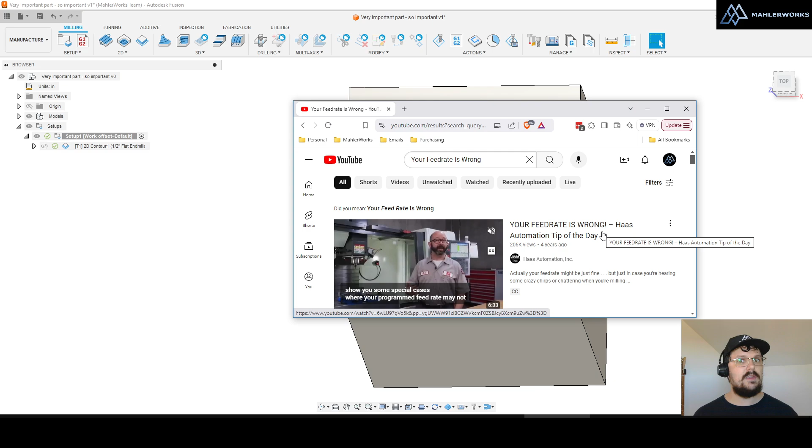And in this video, Mark Terryberry goes over the math and geometry behind why using a large end mill, for example, in a small hole might be programmed with a very incorrect feed rate. And I want to go over that and show you in a real-world example and toolpath what's going on and how to account for it.

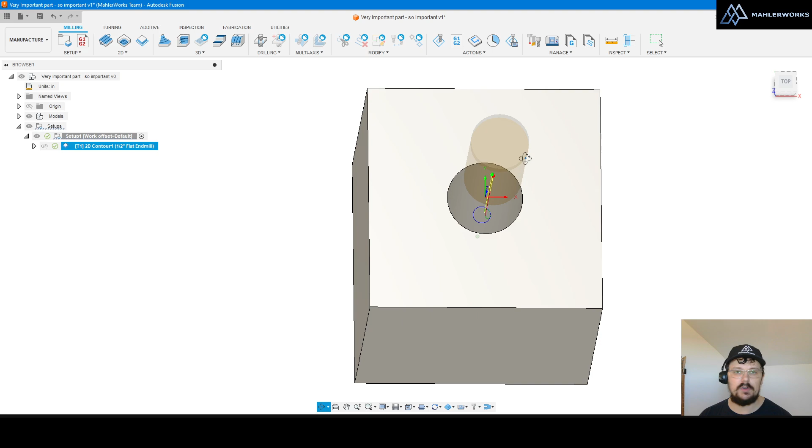I have here a part that has a hole that is 0.65 inches in diameter, and I really want to use a 1/2 inch end mill to interpolate it. Now, if I go into my toolpath, under passes, I am using a compensation type of wear. Another common one would be in computer. Both of those options are going to make a toolpath based off of the center of the tool. This video does not apply if you're using in control or off.

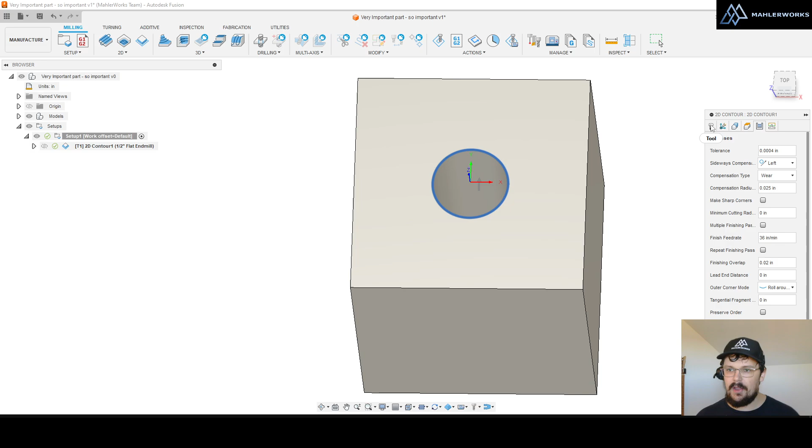If I go over to my tool tab in this toolpath, I see that Fusion's, if I go to aluminum finishing, that's its default feed rate, but this could be any feed rate that you find on an online calculator or a list online of feed rates for a given diameter of end mill. It's going to say something like, in this case, 159 inches per minute.

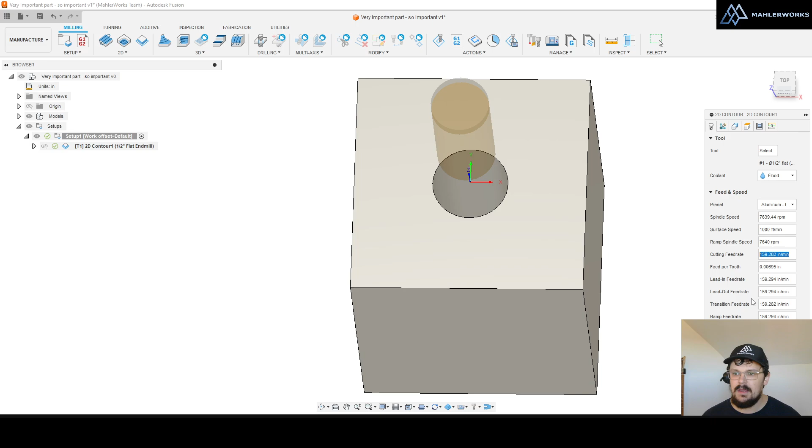Now, if you're a machinist and you're experienced, you know that using a 1/2 inch end mill in a 0.65 inch hole and feeding it at 159 inches a minute does not sound right. It's going to go in that hole and whip around the circle really fast and come on out. Your hole is going to be at least faceted, if not look like trash. And your tool might be worse for the wear as well.

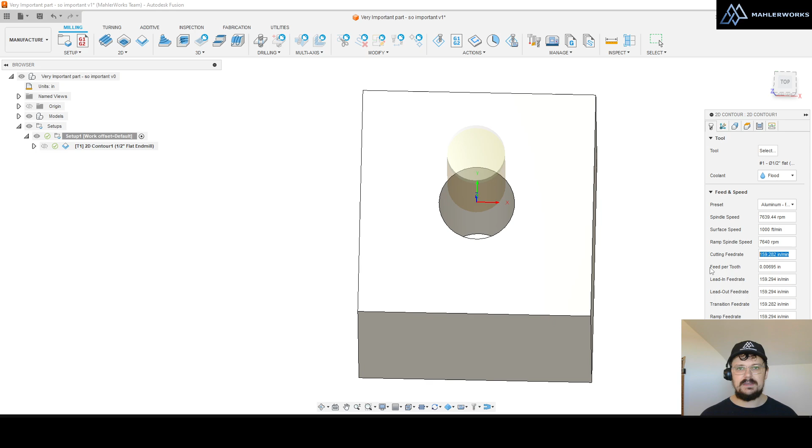The reason is this feed rate is actually for the programmed tool path, which in this case is a much smaller circle than what we're actually cutting. Haas's video goes over that really well, but let me show you the fix. If I go to my Excel spreadsheet that I made a calculator for this very problem, let me show you what I have. I have a hole diameter of 0.65 inches. I have a tool diameter of 0.5 inches. And my supposed feed rate that I'm told I should use is 159 inches per minute.

But based off of the math that Haas goes over in their video, and they explain why we're cutting with the edge of our tool, but we're programming off of the center of our tool, our feed rate is wrong. So our new feed rate actually should be, in this case, about 36 inches per minute. Now, up in the formula here, you can look this over. You can copy this and make it your own. Make your own calculator. I would highly recommend it. This is very useful. But we're doing a little bit of math that Haas's video goes over. So don't just copy this. You can watch their video and figure out the actual math behind this problem.

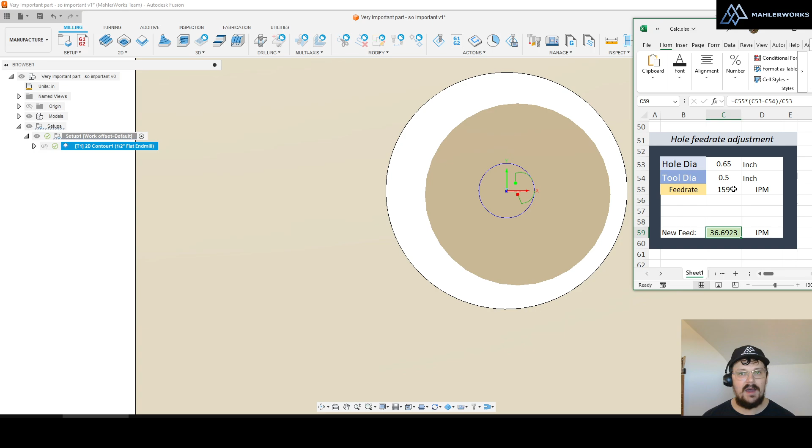So now I know that the feed rate that I should be using is about 36 inches per minute on this hole, not 159. So I'm going to go back to my toolpath, tool tab, and my cutting feed rate, I'm going to make it 36 now. It looks like it already did it for me because I had entered that in earlier. Let me just go through that process properly. If I was on aluminum finishing, my cut feed rate is about 159 inches a minute. I need to change this to 36 inches a minute.

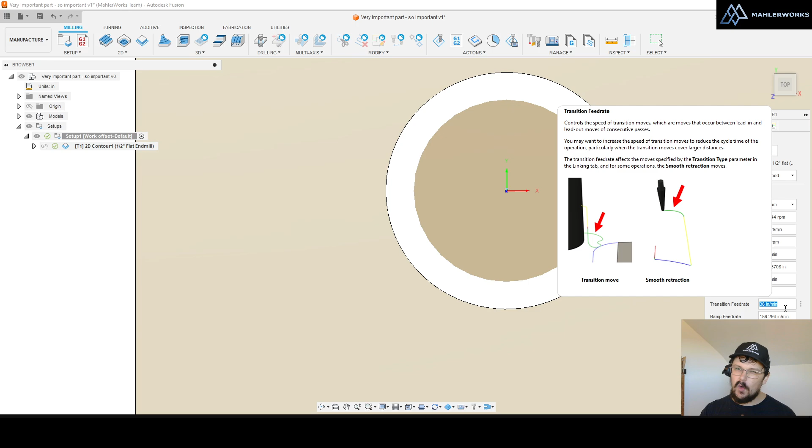And be careful, make sure that your other feed rates also update. My lead-in feed rate did not automatically update. I need to make that, in this case, I'll make it the same, 36 inches a minute. Same with my lead out. Transition feed rate, in this case, I have one hole. It's not going to be all that important, but if I had a whole bunch and I was just leading between them, or features that I was leading between, I would want my transition feed rate quite a lot higher. So make sure that your feed rates are correct for small features.